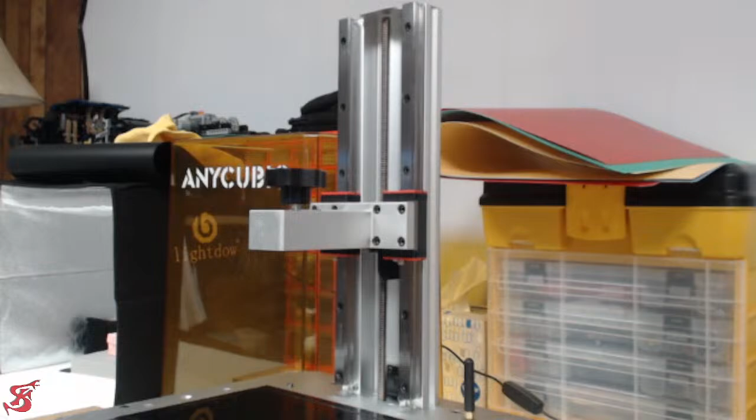Alright, we're going to have to power it on and lift the Z up a bit. Maybe a little bit higher.

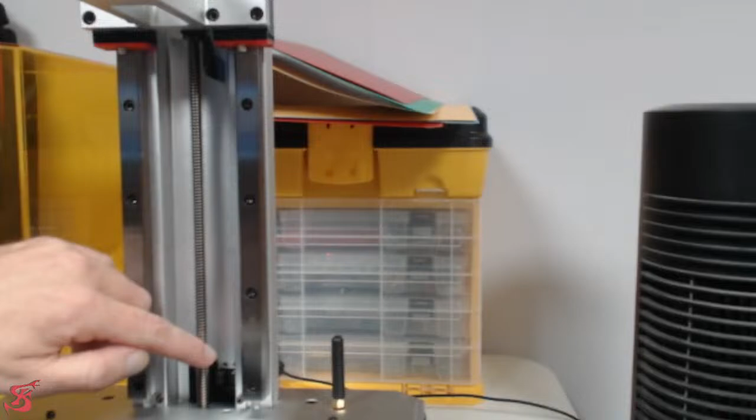Alright, see if we can get the camera in there. Can't really make the camera go much lower, but you'll see right here, this little plate that sticks down, it hits a trigger down at the bottom here, which is what tells it to stop. And so now what's happening is the base of this plate is not reaching here.

So what we're going to do is take this off, and to do that it's just 2 Allen screws. I'm going to cover the screen so that if I drop the key or this piece it doesn't hit the screen.

One of 2 removed. And so essentially what we want to do is just make this plate right here sit a little bit lower, just at the thickness of that addition to the build plate.

So first things first, we're going to have to take some measurements. Let's see. So I'm going to use our calipers, just measure how big this is. Okay.

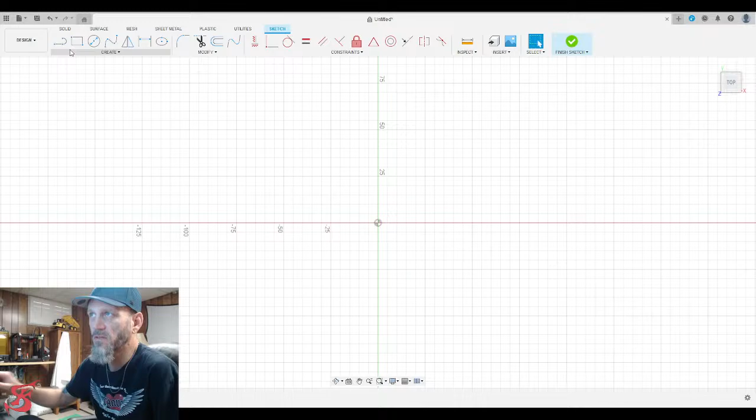We're just going to create a rectangle, and we're going to make it 12.5 by 10.5. And we could even round the corners off a little bit. Let's just make that like a 1mm fillet.

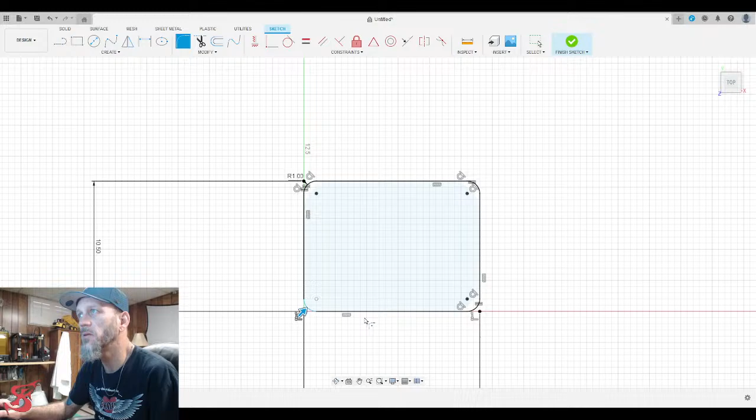Next thing we got to do is figure out how big these holes are. Just measure those up real quick. And they are about 4mm.

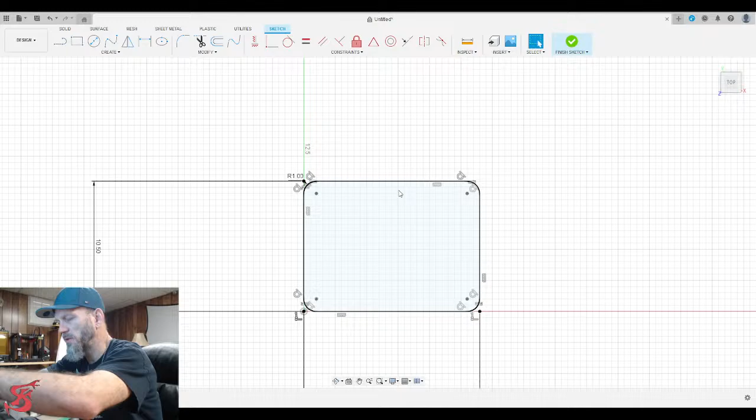And because we'll be printing this on an FDM printer, we want to compensate for a little bit of slop on that, usually about 0.15mm. So we'll make these holes about 4.15, and we got to see how far in they're offset from the edge, because one edge is a little uneven from the other.

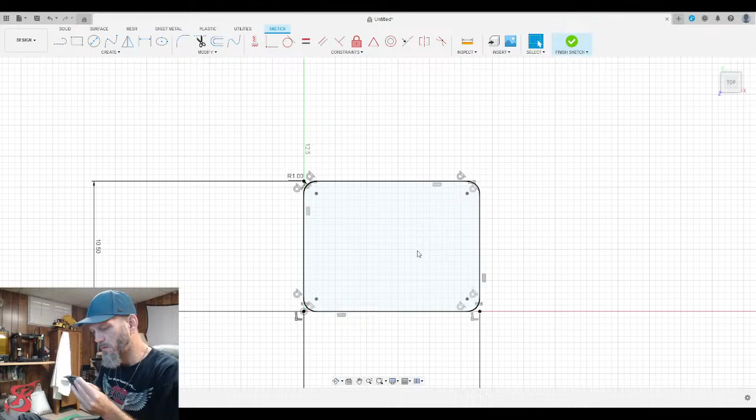Let's see, that's the easiest way to do this. Okay, it's set in about 1mm from the edge, so we can just make a line 1mm in, and then we'll use that as a guide and extend this all the way over.

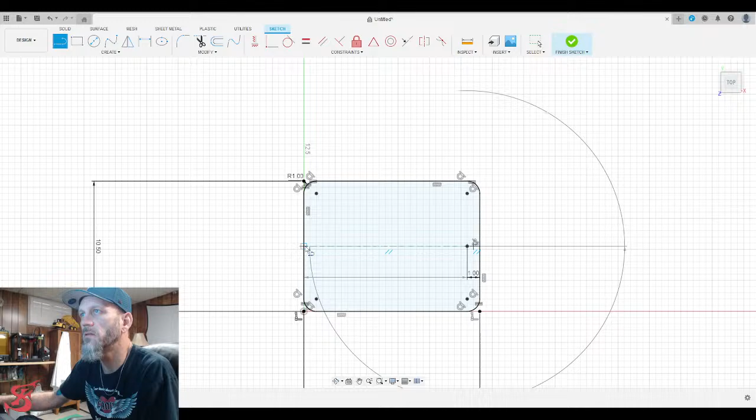We want the circle to be a 2-point. We'll start from where that 1mm marker is, make it 4.15. Actually, that's gonna throw it off a little bit. Let's just do the 4, I think it'll be fine.

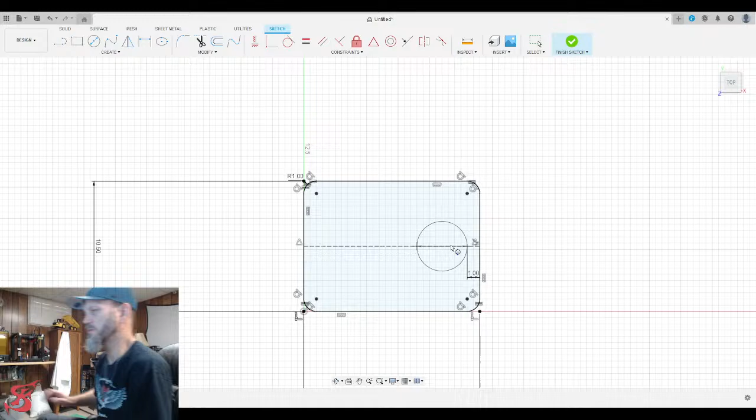Let's measure those screws first, because these look like they're probably M3 hardware. So if we measure that up, oops. Yeah, we only need it to be about 3.25mm, so 4 should be fine.

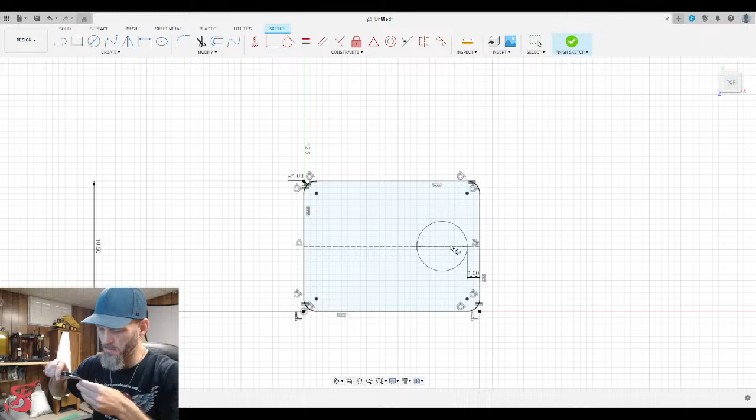That way we don't have to guess about the distance of the other inset here, which looks like it's going to be, let's do this. About 5mm in from the edge, from the same edge.

So we'll set this circle here. We'll do another 5mm line. Oh, that's not going to work out.

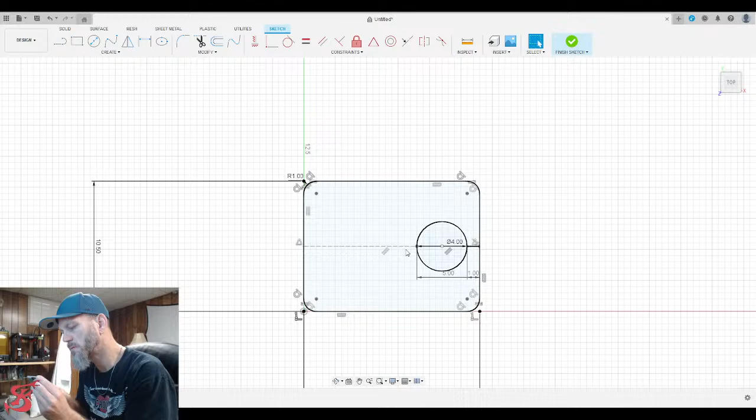Mathing is fun. It's actually got to be about 7.

And then we will make another 4mm circle, 2-point.

Let's just check chat. Jonathan, what's up, buddy? How you doing? Welcome back. We're doing something a little different today, trying to make a fix for one of my 3D printers.

Oh, and you know what? Before we do that, let's change that to guideline.

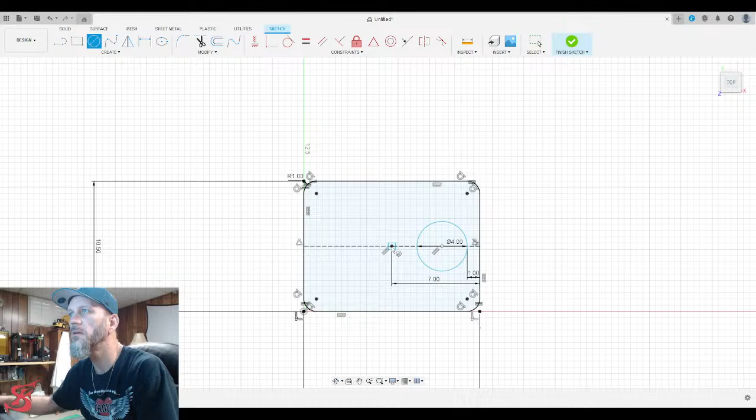So it is a little bit offset, and that's how it looks if you look at it. Here, let's see if that's in focus. Hold on.

So that's essentially what we're trying to offset, and we want it to offset the thickness of this brown piece of the plate, including the top plate there. So let's measure that up too.

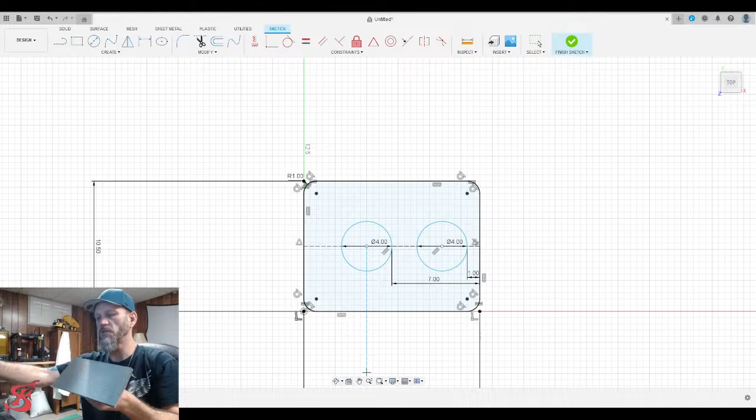And that's 3mm. So that's how far we're going to extrude it.

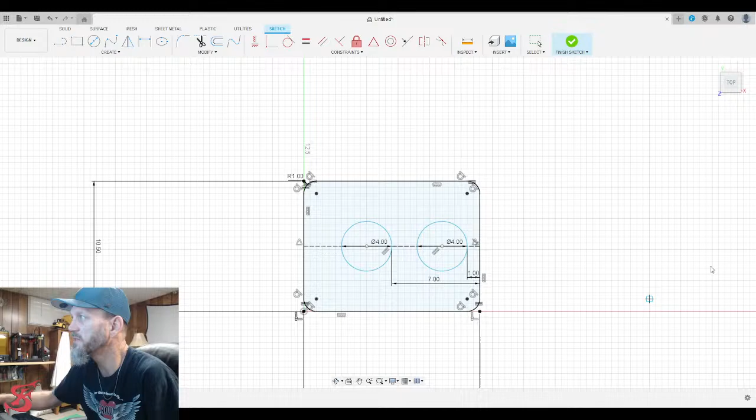Now that we're finished with the sketch, essentially we just want to offset this piece 3mm, so we're going to extrude that. I am not a CAD professional by any means, I just kind of learn as I go. That looks about right. Hopefully this is all we need.

So I've got to save this first. Oh, got to edit some stuff real quick. Make this read only. I'm just using the free version right now, so I can only save so many editable projects at one time. We'll call this SLA printer Z offset, and that goes in here.

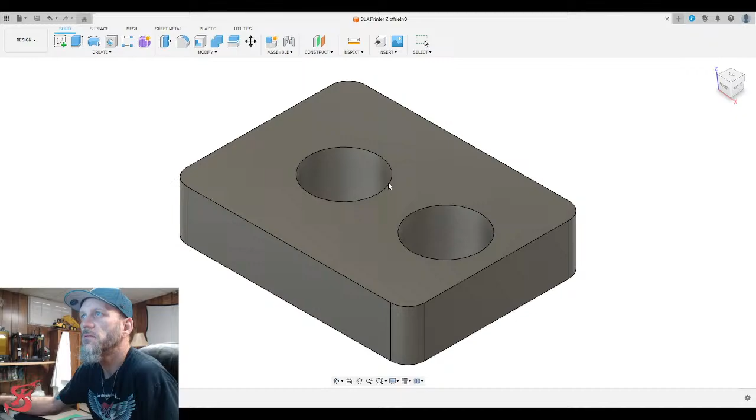Alright, now we should be able to export this as an STL file. Create a new folder for that. Looks good. Hopefully this completes. Sometimes it doesn't.

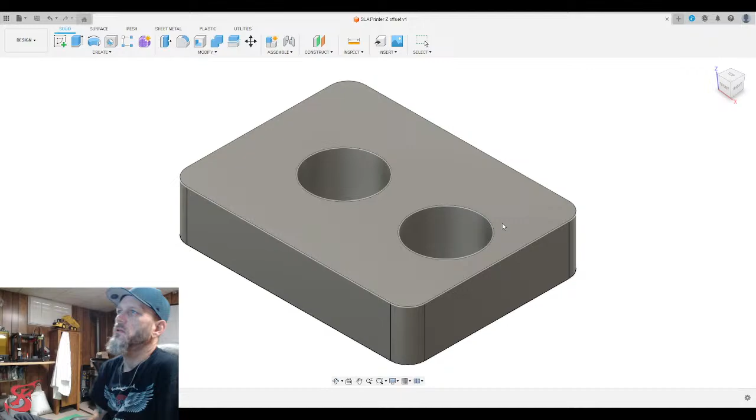In the meantime, I'm going to fire up the FDM printer and get it all warmed up.

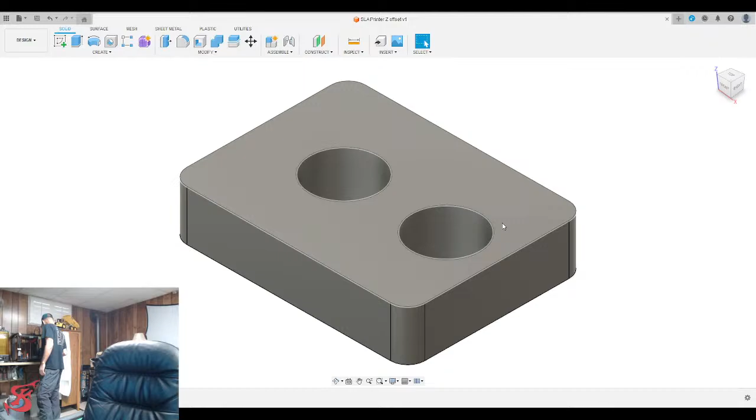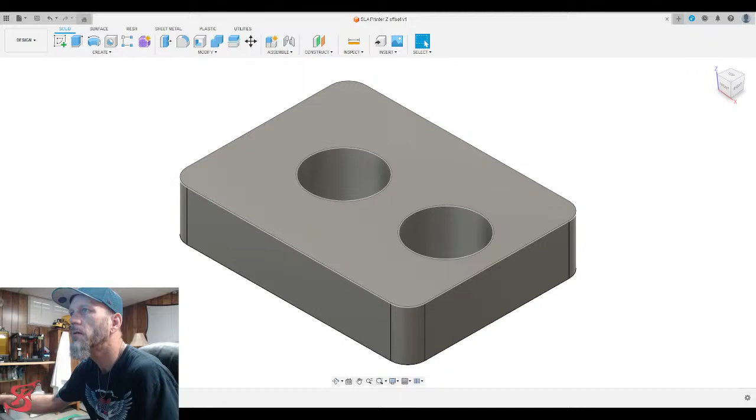Alright, looks like that completed. So let's pop the card in, and then let me switch this view over real quick. Now we're looking at Cura, which is the slicer I'm going to use to turn this into G code.

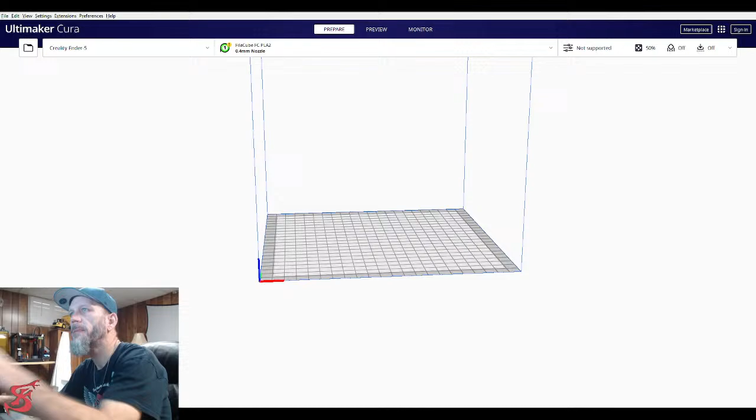For whatever reason, I cannot find my folder in here. Interesting. One second. Oh, I'm looking at the wrong directory, that's going to explain it all. Alright, there we go, so we'll just drop it on here.

Thar she blows. Check our print settings, don't need supports. Skirt should be fine. We'll slow this down a little bit. Set it to 50, should be good. And fill, we'll just do 100 on this since it's tiny. I think that'll be fine.

So what I'm trying to fix here, Jonathan, is on this SLA printer over here. Let me make sure you can see that. I don't have multiple things going on, but on this Anycubic printer, I have added an addition to the build plate. I added this magnetic plate that is removable, and the thickness of this is preventing the Z limit switch from triggering. So when you try to set it home where it finds the base area, it just lowers this down until it hits the Z axis limiter switch.

Glue it up a little bit. Should be leveled. I should probably check it, but that takes more time than I want to spend, honestly.

Insert the disc, initialize the card, find it on the card. Got too many things on this card. Still looking for the file. Still looking. Okay, maybe I didn't get it on there. Let me try again.

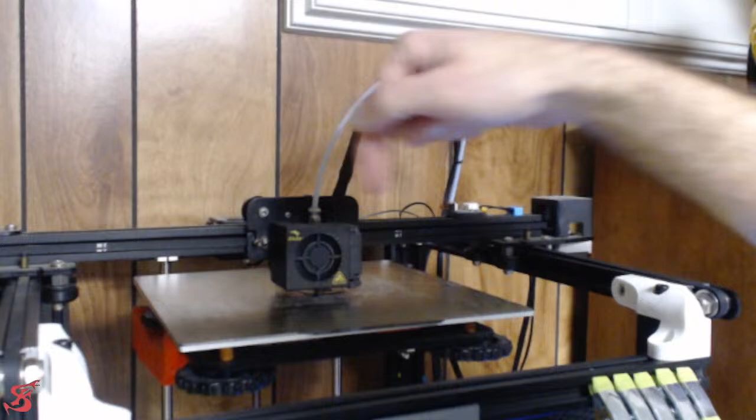Should you buy a 3D printer? Well, if you're into prototyping, fixing stuff, or you just want to make cool things, yeah, you should buy one. As far as cost, it varies quite a bit. A printer like this is the Ender 5 by Creality, and when I bought this one, which they've got upgraded models of now, I bought it about 4 years ago for probably about 350 bucks, but this has been my most reliable printer. The reason I like this one so much is the whole setup with the frame, where the print head is the only thing that's moving.

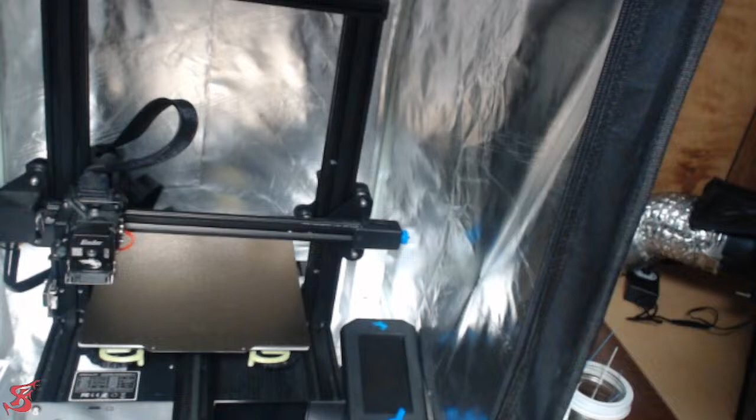It seems to create more reliability and robustness in the printer compared to this one over here, the Ender 3. This one's what you'd call a bed slinger, so the bed actually moves back and forth, and the print head moves left and right and up and down. I've had a lot more problems with this one than the Ender 5, and this is way newer, but it's also substantially cheaper. I think you can get this printer to start around 150 to 180. And then the one we're fixing is an SLA printer, a different type altogether. It's a resin printer versus an FDM. This is what's called SLA, stereolithography.

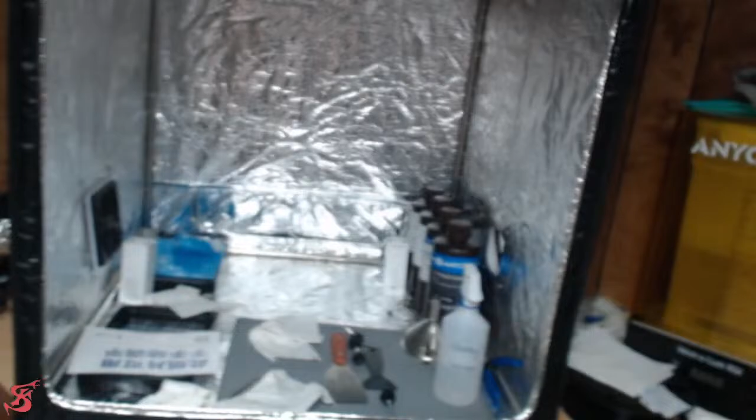These are quite a bit more involved to work with, and quite a bit more expensive. That printer, with all of the stuff to use it, including the enclosure with the ventilation, which runs out the window, and then the wash and cure station, cost about $1,000 when I got it.

So I'd say if you're going to start out with something like this, if you can afford it. If you can't, try something more like the Ender 3, just a bare bones model so it's not too expensive, and that way you can figure out how it works and troubleshoot everything before you start adding things to it, because that makes troubleshooting a lot more complex than just a stock printer. These things will work right out of the box pretty much.

You want to see it from the top? Let's see if we can get a view of it. Can't really see it because it's going to be underneath the print head. I could lower it down so that it looks into it a little bit better. Let's see. It's about as close as I can get it. This isn't a great camera, so sorry about any focus issues.

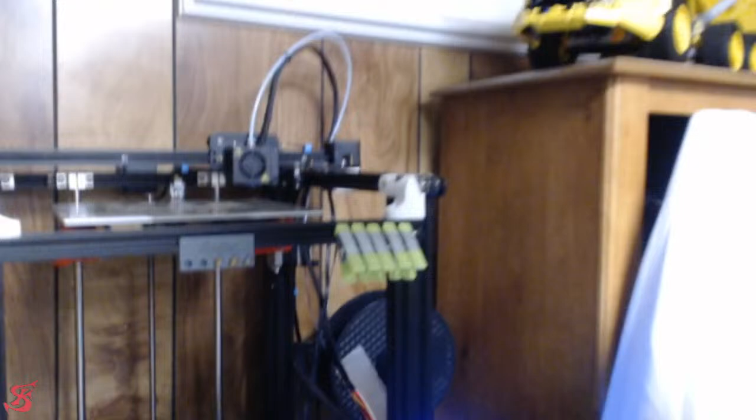You can see this piece we just made only took about 4 minutes to print. That's pretty forgiving, right? But bigger stuff is going to take longer. The more infill you have, the longer it's going to take. The more need for support structures, the longer it's going to take. So there's a lot of factors involved in print time, and you kind of just learn as you go. If your print time's too long and you're just trying to prototype something, you might just end up throwing it away. You can always adjust your settings accordingly.

And here's our piece. So let's see if the measurements came out right, and if we can install it.

Alright, let's see. What's my longest print? I've had some take about 12 to 15 hours, depends on what you're printing though. A lot of bigger stuff is going to take a lot longer. I've had the slicer tell me certain prints were going to take up to 3 days. But again, it all depends on what you're doing and how you're doing it.

So now we're going to check the fitment with the piece and see if it lines up. It's practically perfect, you can see right through it, which is exactly what we want. So we'll just thread the screws through it and see if there's any resistance or anything.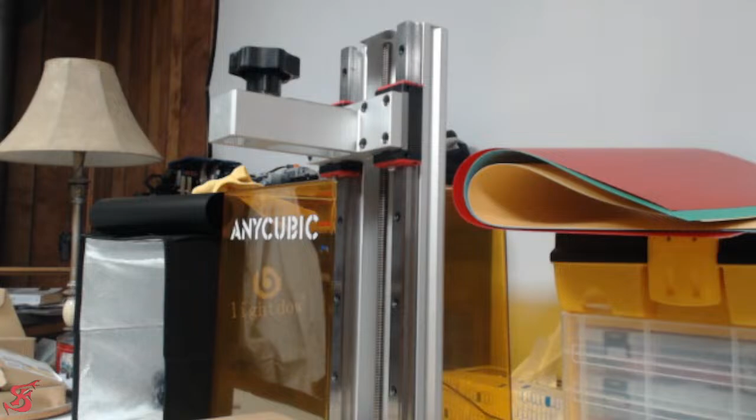So let's bring her over here. Reason I got this box here is because if I drop anything, I don't want it to land on the screen.

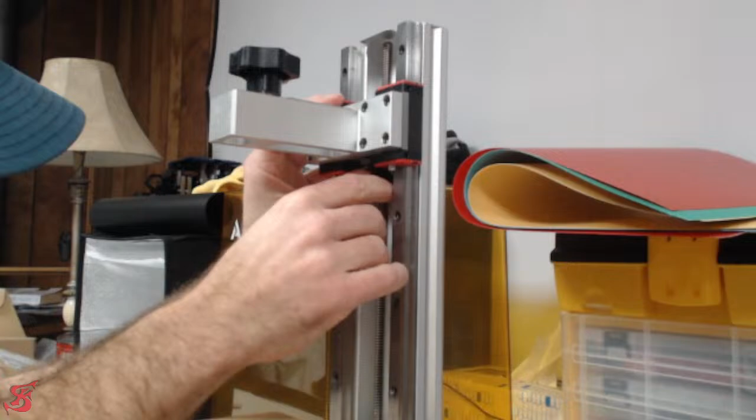Alright, so this has got to fit up in here, just like that. Let's see if we can get one started. Should be good. Get the other one started.

We don't want to do it too tight yet, because we want to see if it's going to actually line up with the sensor the way it's supposed to before we tighten it down too much.

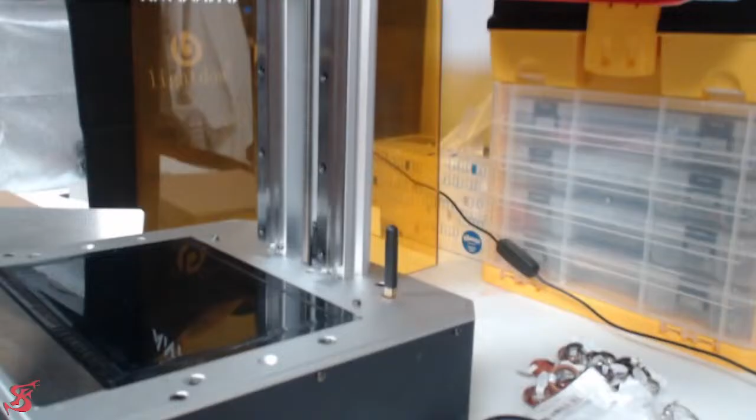Alright, so now we'll turn it on. Let me just adjust the camera angle a little bit. Move it over so you can kind of see what I'm talking about.

So if you look right here, this little gap is what this piece is supposed to... let me lower it down actually. Gotta wait for it to boot up.

So you can see this piece that we just installed here that's moving down, this black piece. That's going to line up inside of here. So we're just going to get it down there close to it.

Now I'm just going to see if it looks straight, and it does. So now I'm actually going to put it back up a bit and tighten those screws down.

Come on, go up. Recover the screen here. Come on, move up there.

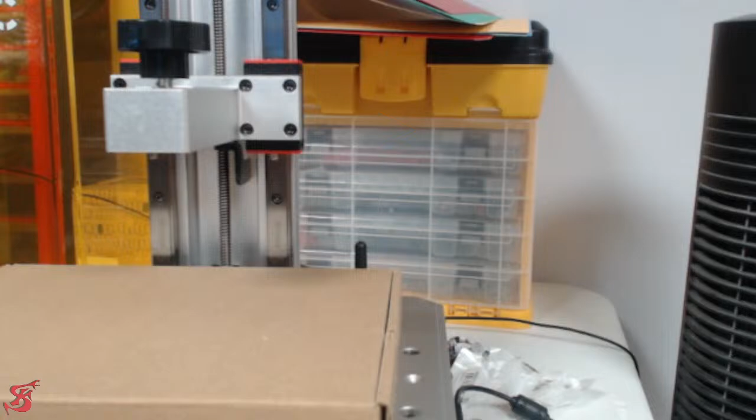Tighten them down a little bit. Should be good. Alright, so I'm not going to put the build plate on to check this. I just want to see what we're looking for here is when I home it, it's going to try to go all the way down to where it thinks it should stop, and we're going to hope that it stops where it's supposed to instead of trying to keep going.

Oh, but you know what? I actually will have to put the build plate on for that. So let's just put that on. Let me go get my leveling sheet real quick.

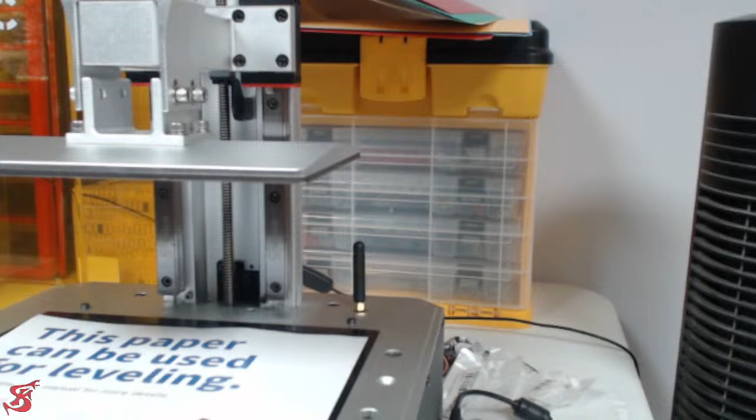Alright. Now we're going to hit home and hope for the best. I'll cancel the home or turn it off if it starts to grind.

Perfect. Alright, that fixed it. Now we might actually be able to use this printer. Sweet, I'm stoked about that.

Cool. Alright, so if we want to finish the leveling process here, grab the Allen wrench.

Oh, I'm so glad that worked. I was stressing out about this.

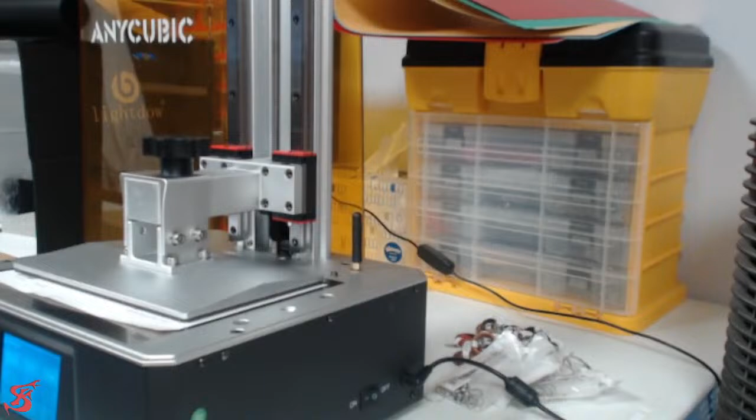Me and my buddy want to get making and painting mini figures and stuff, and I was just afraid that this was going to be a bigger issue than it turned out to be.

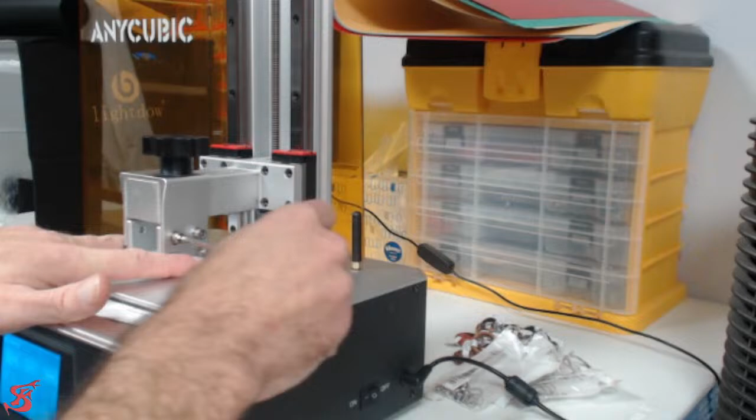So we're just putting slight pressure on the build plate, not very much, and we're going to tighten these 4 screws up around the sides.

And that should make it so this is just snug if I pull on it. Yep, cool. Alright, hit Z0.

Alright, we've got it zeroed to the home position. So now I got to reinstall it all back in the enclosure and stuff and give it a test print.

But I don't think I'm going to stream the test print part, just because it's kind of a messy process and I don't really have a good place for the camera for that. Yeah, that's that. So problem solved.

And anybody else that might have this issue, what I'm going to do is raise that up a little bit. What I'm going to do is take that print file that I made for that piece.